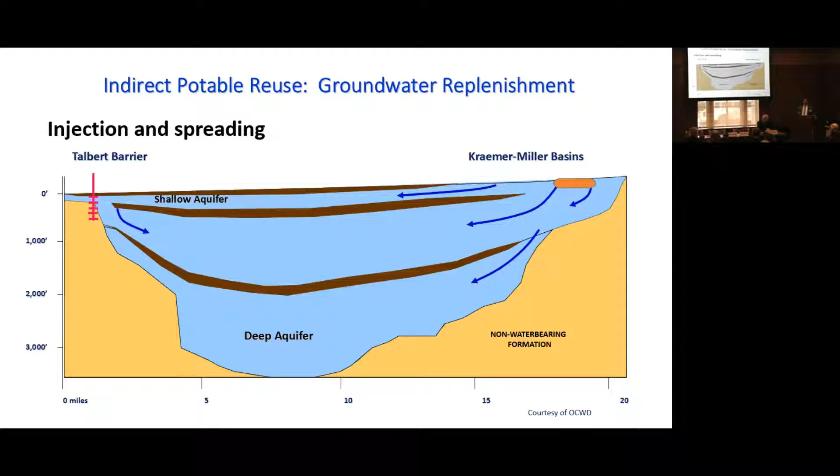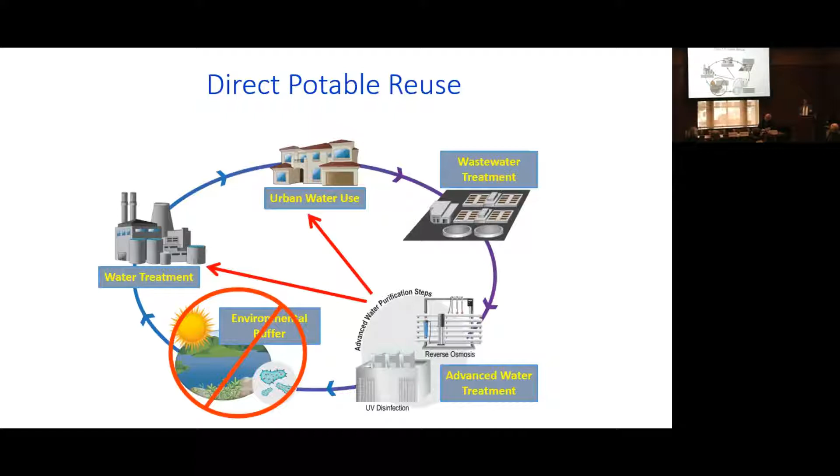So I just want to go over briefly what we're talking about in terms of potable reuse. We have indirect potable reuse that utilizes an environmental buffer, so it can be a groundwater basin, and there's two ways to get the water in the basin: you can do it through wells called injection, or spreading through basins, which also involves natural treatment, soil aquifer treatment. There's also surface water augmentation, I don't have a slide on that, that's another form of indirect potable reuse. And then what we're talking about a lot today is moving towards direct potable reuse, where we avoid the environmental buffer, and we either go directly to a surface water treatment plant or directly into a water distribution system. So there's a lot of questions associated with this, and I have a couple slides at the end specifically on direct potable reuse. But I want to step back in time a little bit and talk about where the National Academy of Sciences supported this area.

Back in 1982, and I really didn't know about this report that much until recently when I was looking this up, there was a report commissioned by Congress to study the use of wastewater, contaminated, or today we'd use impacted, Potomac estuary as a new source for the District of Columbia. It didn't go through, but basically they were going to use a reservoir, an estuary that had wastewater discharged into it, and they wanted to know if that could be done safely.

So it focused on water quality criteria. This was actually the toxicology board, not the WSTB. And the findings were very relevant today: the importance of treatment reliability, you'll hear that word a lot, the need for confirmatory data, which we call monitoring or compliance or performance data, a lot of monitoring of parameters, and the limitations on detecting trace organic chemicals at the time.

So what was going on in the potable reuse world? Well, there were specific projects that I call case by case, trying to solve specific issues. In California, they call it water supply, but they didn't have to build a pipeline to discharge to the ocean. There were reasons it was more practical for them to spread it, but that's the longest serving project, still operational today: Water Factory 21 in California, which was a saltwater intrusion barrier to protect the basin from seawater intrusion. That project has evolved into the groundwater replenishment system in 2008.

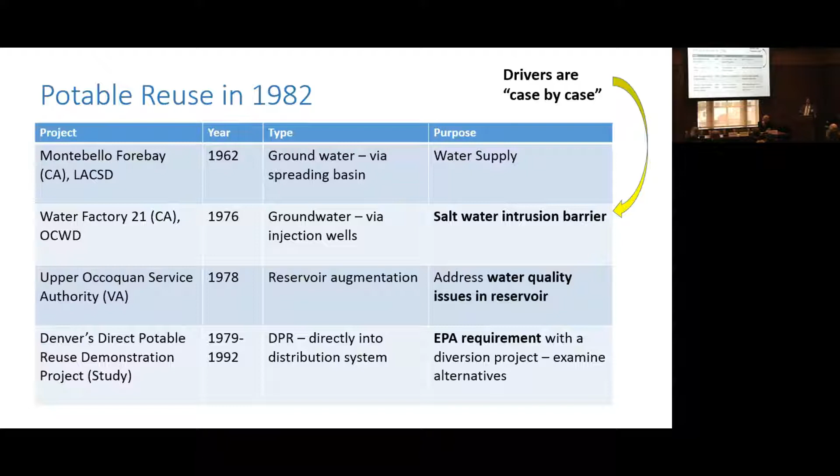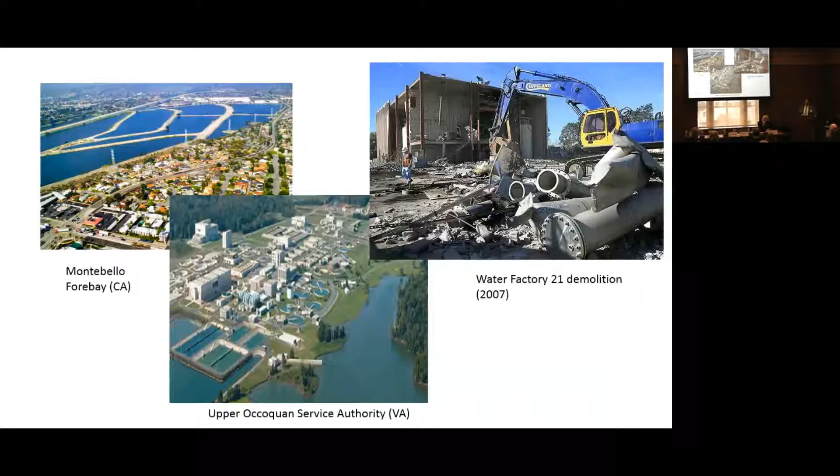So here are just a few pictures of Montebello Forebay. It's still in place, in a very urbanized area. Water Factory 21 was torn down in 2007 to make room for the groundwater replenishment system. And the Upper Occoquan Service Authority, that's their facility here, discharging to the Occoquan River.

I do want to take a minute and talk about the role of non-potable reuse, because we were able to become comfortable with potable reuse based on our experience with non-potable. We're using wastewater for other things besides discharge. It required a change in thinking, it was meeting customer demands, there was additional treatment needed, we worried about reliability more, and we had different water quality requirements.

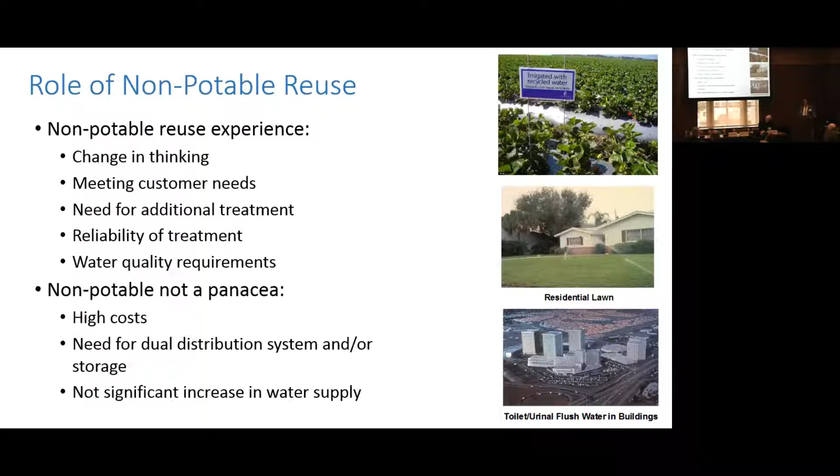But what we found out through a lot of work there is that it wasn't a panacea. There were high costs, you had a dual distribution system, maybe storage during wet months, and it wasn't a huge increase in water supply. So non-potable is valuable when it can be done, but it didn't solve all the issues we were trying to address through water reuse.

So in 1998, things were changing. There was more reason for the National Academy of Science to revisit this. A lot of our best water sources were already developed in terms of groundwater and surface water. We had more technologies coming on, advanced oxidation, membranes. There were public health studies with current projects, particularly EPI studies in Los Angeles. And there was increasing interest by communities and utilities in pursuing potable reuse.

So the study was supported by a range of interested parties. EPA was the largest contributor, but we talked about the USBR's interest, the research foundations, as well as utilities.

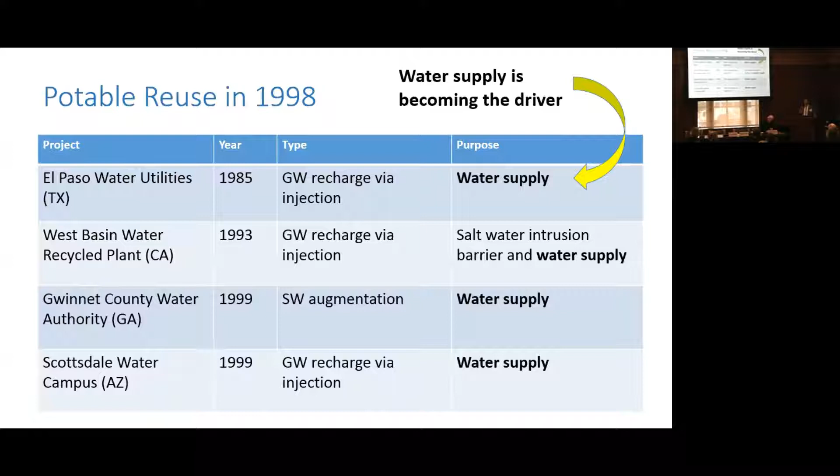So in 1998, there was a different landscape. We had more projects. El Paso had a project that was groundwater injection. West Basin, in South LA, had an injection project. Gwinnett County had surface water augmentation at Lake Lanier. Scottsdale had a groundwater recharge project via injection. And the primary reason was mainly water supply. So you can see now the idea was to use this as a resource for water supply, not just to solve a water quality or discharge issue.

So in 1998, the report covered a range of relevant topics: chemical and microbial contaminants, assessing health risks, which was very useful for having a science body do that for the industry, understanding the health effects, and then looking at this idea of reliability and quality assurance.

As most of you may know, there was one sentence that's very well known and has been a prolonged discussion within the industry: that the community views the planned use of reclaimed water to augment potable water supplies as a solution of last resort. So it resonated, we still talk about it today. We talk about how maybe it set us back, but I actually think in many ways it made us sharpen our pencils and think about this more, and realize that yes, this is provocative and we need to do it the right way. So a lot of good came out of that statement, but it did last with us and was part of our conversations.

So in 2012, there was another report published. This was looking at water reuse in general, but potable reuse was a big part of it. And the landscape was changing even more. There was a dramatic increase in interest in reuse, particularly potable reuse. We had four states that were doing a lot of reuse. Water scarcity was becoming a driver.

However, there were also several projects that failed during this time. Say they were proposed within a community, and due to issues, whether political or social, maybe the projects just weren't good enough, but they failed. And that got our attention. We knew that we just couldn't do these projects, we had to figure out how to make them acceptable to the public and really help them understand that they solved issues.

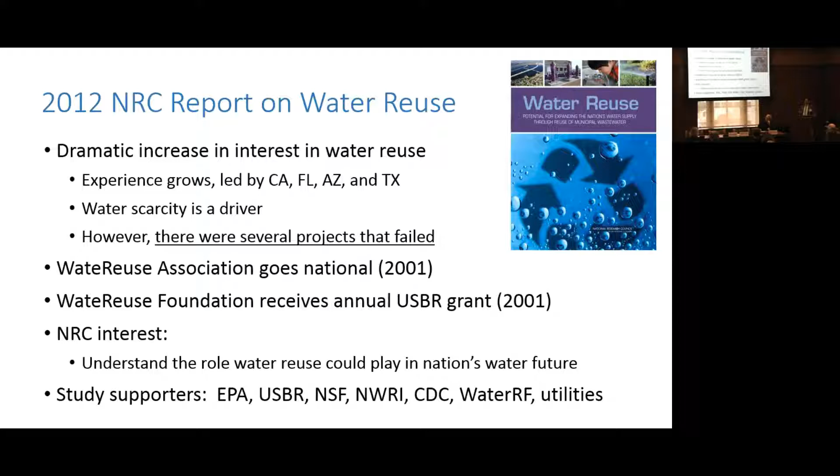The WateReuse Association went national. The WateReuse Foundation received a grant from the USBR. We used to call them earmarks, we can't talk about those anymore, we don't have that. It would be nice if we could get some federal funding for these type of research efforts. The NRC was interested in understanding the role of reuse and what part it could play in the nation's water future. The study supporters were a lot of the same ones, but you also see folks like CDC show up, National Science Foundation, and you can see the interest was broadening.

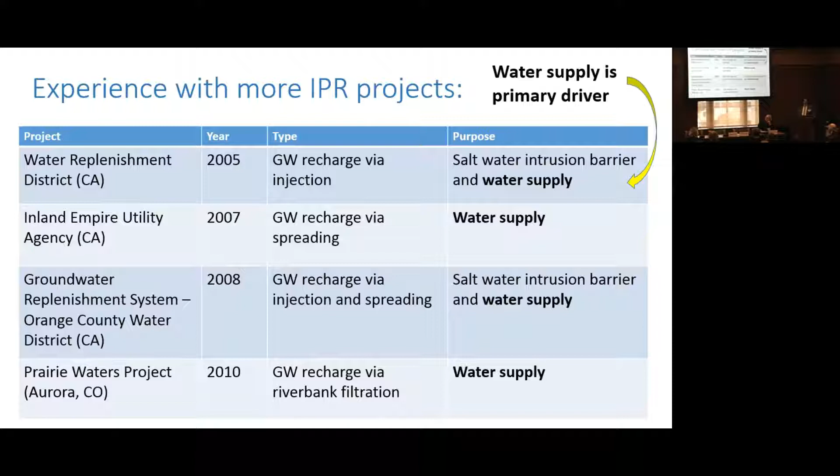In terms of projects, things were becoming bigger and more widespread. The Water Replenishment District in Southern California had a saltwater intrusion barrier as an application, but they're really interested in the water for water supply. Inland Empire Utility Agency, where Rich Atwater spent a long time as GM, has a groundwater spreading project. The groundwater replenishment system took the place of Water Factory 21. Right now it's the largest facility of its kind in the world, expanding to 130 million gallons a day, which is about 30% of the water supply in Orange County, California. There's also a project in Colorado involving natural riverbank filtration, again for water supply.

So the 2012 report was important in a number of different areas. One, we were really hoping we could get past this idea of the option of last resort, and we think we did. The committee came out with language that drinking water augmentation could increase the nation's total available water supply. That was very useful for us.

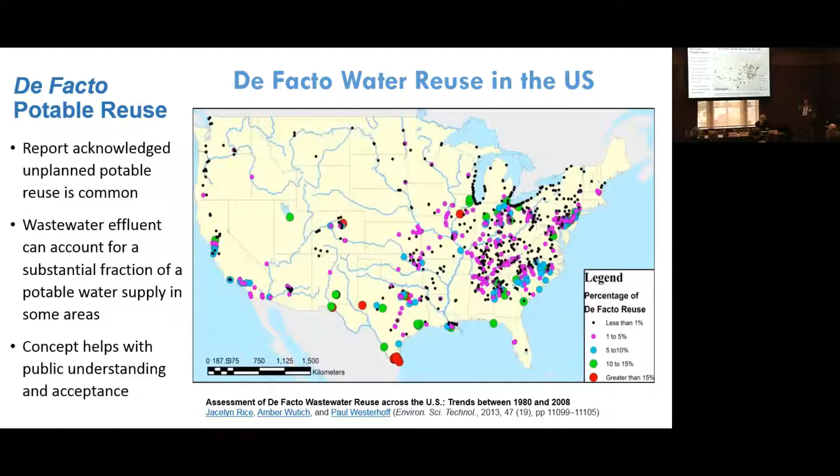I use this type of slide in many talks that I give around the country on reuse. It also addresses the idea of de facto potable reuse. The report acknowledged it, and this really helps us with public acceptance, that they understand our waters aren't as pristine as we tend to think they are. It also addressed a lot of science questions around treatment, monitoring, and operations - treatment options exist, but monitoring and operational plans are needed. I really felt the discussion on risk was very helpful: there are methods to assess risk, and an occurrence of a contaminant doesn't necessarily mean there's a significant risk. It's useful for a science body to be able to say things like that.

So now there are a number of planned projects, and we see the concept growing. The Metropolitan Water District of Southern California, which is solely a drinking water agency, is thinking about reuse - they're planning to build the largest reuse IPR facility in the world at 160 MGD. Hampton Roads Sanitation District here in Virginia has a bit of a different driver: they're going to get nutrients out of the bay, mitigate subsidence, and address groundwater overdrafting. There are a lot of benefits associated with that type of project, and that's probably what it'll look like in places like Virginia. El Paso Water is thinking about a DPR system - this would be a system without a surface water treatment plant.

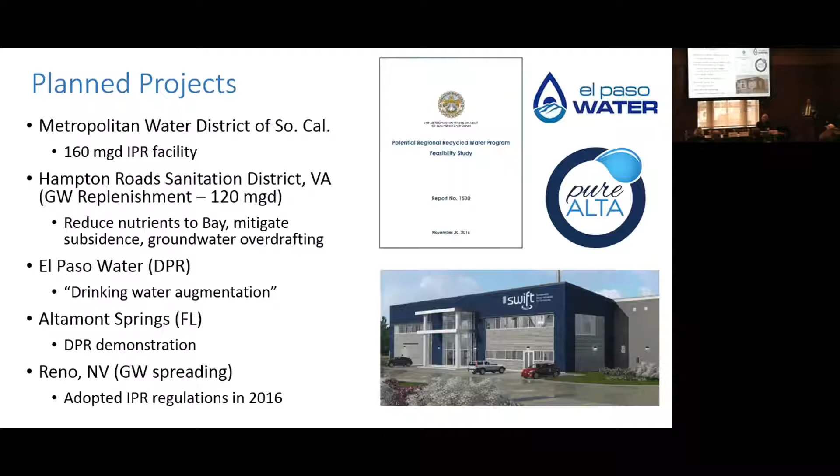They're moving forward with design on that. Altamont Springs has a DPR demonstration in Florida. Reno's in Nevada—other states you wouldn't think of, they adopted regulations in 2016 and have a project planned. So just a couple words on direct potable reuse.

Utilities see large advantages to going to reuse. It increases their flexibility—if you don't have a groundwater basin or surface water reservoir, you're still able to do it. And it's part of an integrated water approach. That's where we're going in terms of thinking about our water resources, doing it in a more integrated way. DPR and IPR fit into this.

We do have a DPR facility in Big Spring, Texas. It's the only operational one in the United States. Wichita Falls was an emergency supply—again, it was DPR, and it operated for one year.

In California, the State Water Board was asked to look at this. They had an expert panel answer the question of whether it was possible to develop regulations for DPR. They said yes—David Sedlak served on that panel. It was a great success in terms of the issues they covered. And there's lots of other states interested in regulations: Arizona, Florida, Colorado, to name three.

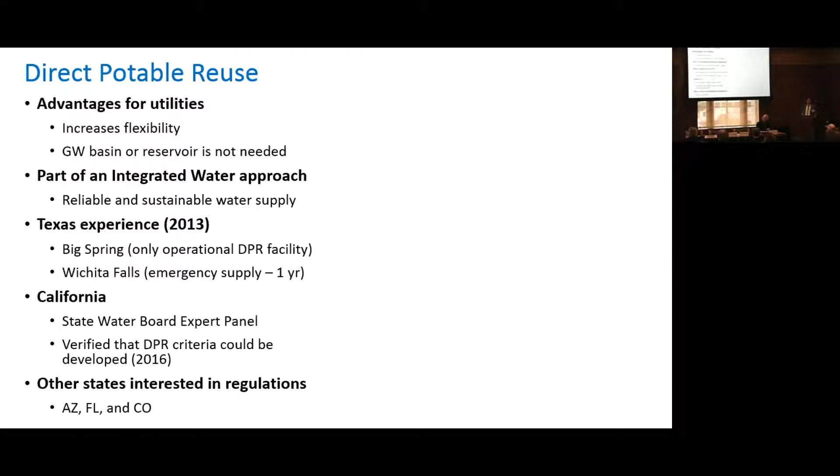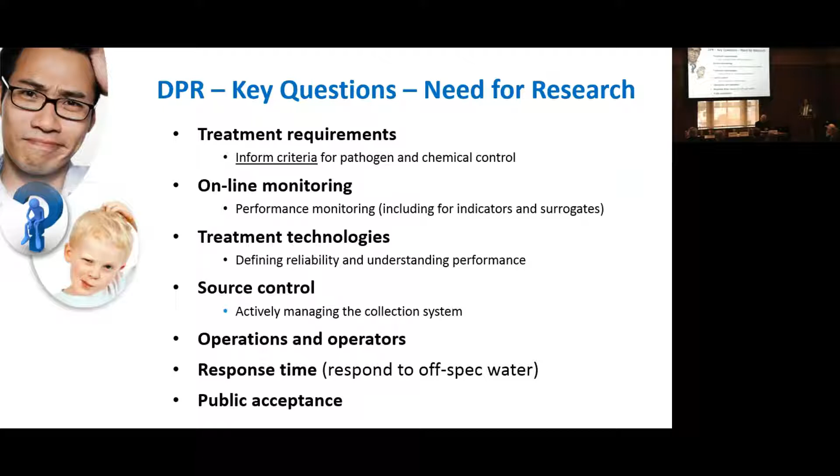So in terms of DPR, we do have key questions: treatment requirements, monitoring requirements, the technologies—are they reliable, understanding their performance—source control, keeping constituents out of the collection system. Operators and operations comes up as a big issue for regulators. They want to know it's operated correctly, response time, and public acceptance.

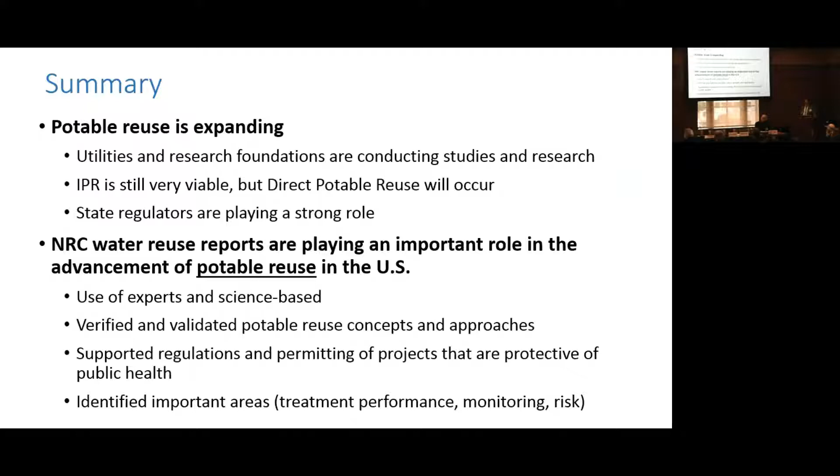So I'll just finish up with a quick summary. Potable reuse is expanding. Utilities and research foundations are conducting a lot of studies and research. IPR is very viable, and DPR is going to occur. State regulators have played a critical and positive role here. The NRC water reuse reports have played an important role in helping to advance potable reuse—the use of experts, science-based approaches, verified a lot of the concepts, supported regulations and permitting, and identified important areas for us to study.

So Dave, I'll stop there and turn it back over to you.

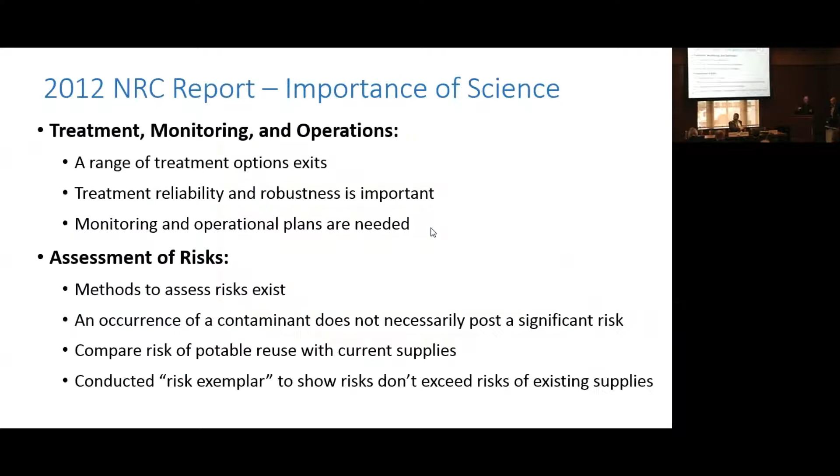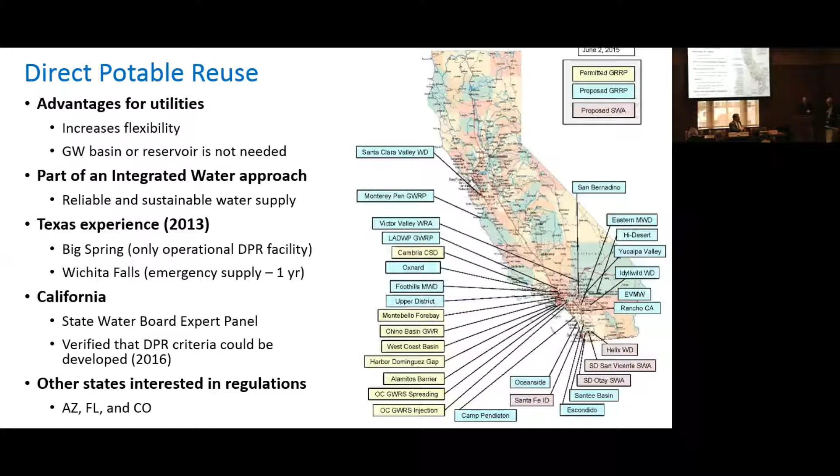So I think that's a perfect segue. The second half of our tag team, Dr. David Sedlak from the University of California at Berkeley, is going to look forward with us and get a perspective on where we're going to see water reuse programs going in the future. Thank you, Jeff, for giving us such a nice background to things.

I'm very happy to be here and to join the Water Science and Technology Board. This morning I sat in on the meeting and saw a lot of water scientists, an economist, and a few people who were bored. But I didn't see a lot of technologists with a capital T. I think maybe there are a couple of us thinking about this issue of technology, and I think technology is really important for a couple of reasons. One is that when a scientist or engineer invents a device, it's a technology, and that technology diffuses—it takes time, and then it comes into commonplace practice.

When new technologies are invented, they create new industries that jumpstart off of that existing technology. And finally, those new technologies sometimes teach us a way to see the world in a different way.

Consider your iPhone for a moment. 10 years ago it was invented. In a period of a few years, it diffused to a point where it was in just about everyone's pocket. As that device diffused, it created new industries, things like mobile navigation, mobile medical help, and also things like social media.

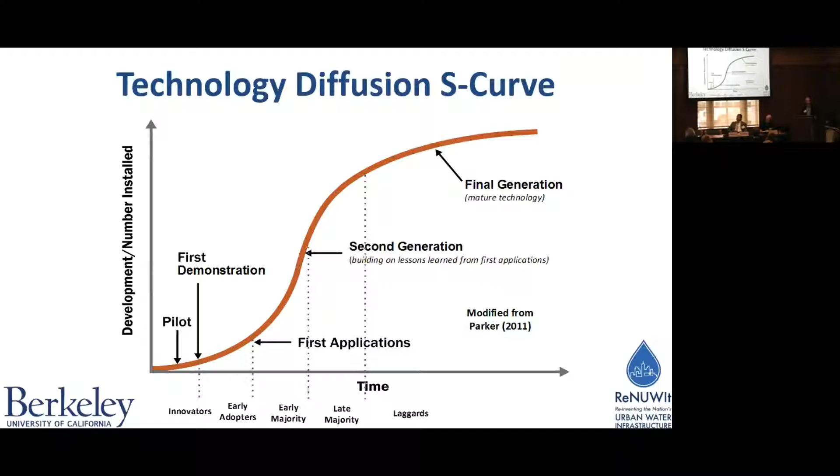I think Jeff told you about some of the projects that diffused out into the world, and how now we're moving into this period of the second generation, when new water reuse technologies are being used.

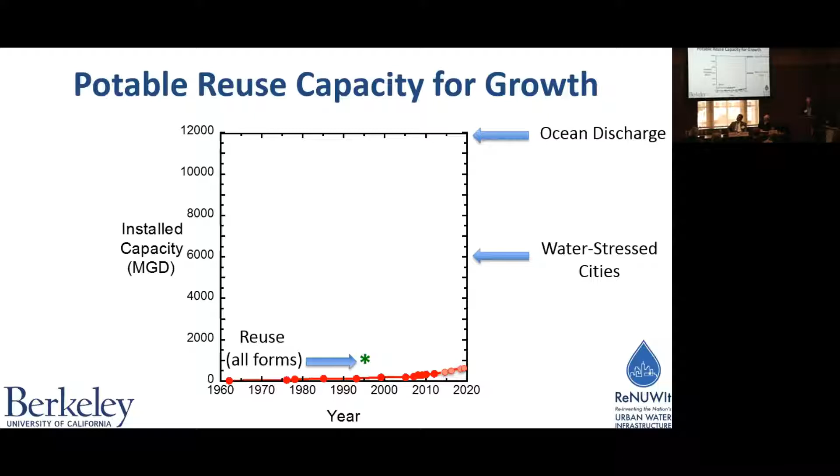Now, since the 2012 report, as Jeff told you, we've had a variety of new projects. In fact, the capacity of potable water reuse has increased by something like 80% since the 2012 report. So the technology is moving quickly, and as Jeff gave you that impression, we're diffusing quickly, and you get this idea that the train has left the station. But if you think about it harder, you'd say, well, we're only at 5 or 10% of our total capacity. What's holding us back?

With that in mind, the NSF Engineering Research Center, ReNUWIt, with a program in which I'm the deputy director, joined with the US EPA and sponsored a workshop at the Johnson Foundation at Wingspread in Racine, Wisconsin, on October 27th to 29th this year.

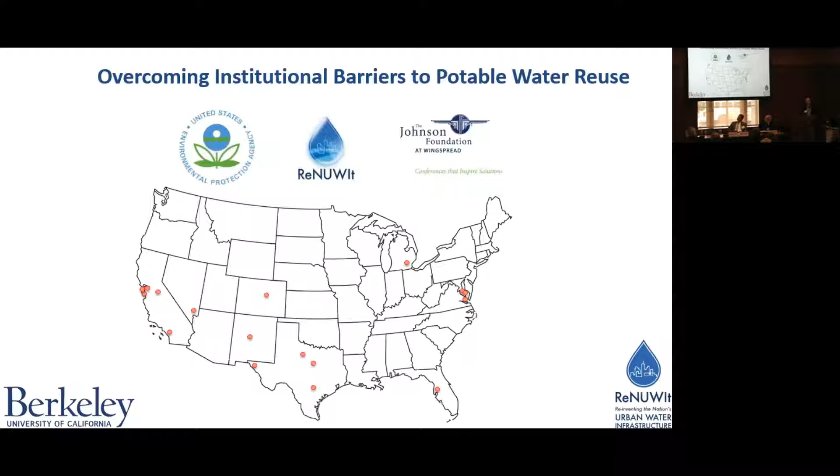We posed this question: how do we overcome the institutional barriers to potable water reuse? Because if we're not moving out and filling that need and the technology is not following the traditional S-curve, maybe there's a problem. It's not a technological problem. You can see that projects like the groundwater replenishment project in Orange County are doing just fine, thank you. There's not a big question anymore about the technology. Perhaps it's the institutions that are holding us back.

After a day and a half of discussions, we changed the title of the workshop because we came to learn that it's not really a question of institutional barriers. It's a question of leveling the playing field. Because water reuse is a technology that's ready for prime time. What we see happening now is that it has to undergo this process of mainstreaming where engineers and water supply planners look at it as a viable technology that they can use to expand a region's water supply portfolio, and it has to come to be seen on the same footing as other water supply options.

So when I think about the NRC's role in the future of potable water reuse, I feel like organizations like WERF or WRF, or whatever it's called now, Jeff, are doing just fine, thank you, because there's an industry that's taking this technology and moving it out, and there aren't the same sorts of large overarching questions. Even the DPR question is being handled by groups like the California Expert Panel or some of the expert panels that have been convened around the country.

So in terms of the first question of diffusing, it took the iPhone 5 or 6 years. It took potable water reuse 30 or 40 years, but it's on its way.

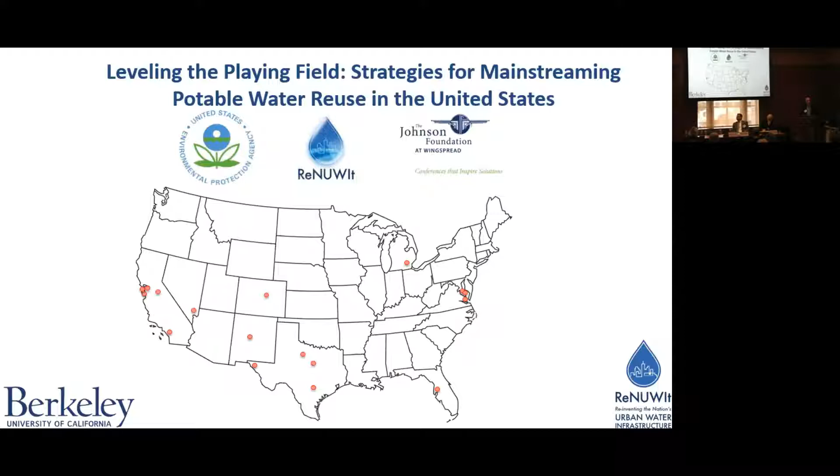What are the new industries, though, looking forward that are going to be spawned by water reuse? I think the real issue is how we scale it down. A lot of cities that have built potable water reuse systems right now are big cities with big treatment plants, 100 million gallons a day of water serving the needs of 1 million people, and they have a lot of expertise. They have full-time staff members who can dedicate themselves to water reuse projects. In some cases, they have sophisticated laboratories and PhDs on staff.

But not everyone lives in a city where you have a water treatment plant, a wastewater treatment plant that serves 1 million people. So a lot of cities are looking at what's going on in potable water reuse and saying, well, what about us too? And it's not just cities thinking about it, it's people like real estate developers and architects who are looking at this and saying, maybe this is the way in which I create a new water supply in a water-stressed area where I don't have access.

So one of the overarching questions now as this new industry starts to develop is: is it really different? Is it the same and only smaller, or are there differences? When I think about the differences between a large centralized treatment plant and a small scale treatment plant, I'll tell you in a moment what I mean by scale. One difference is you don't have the expert operators on site.

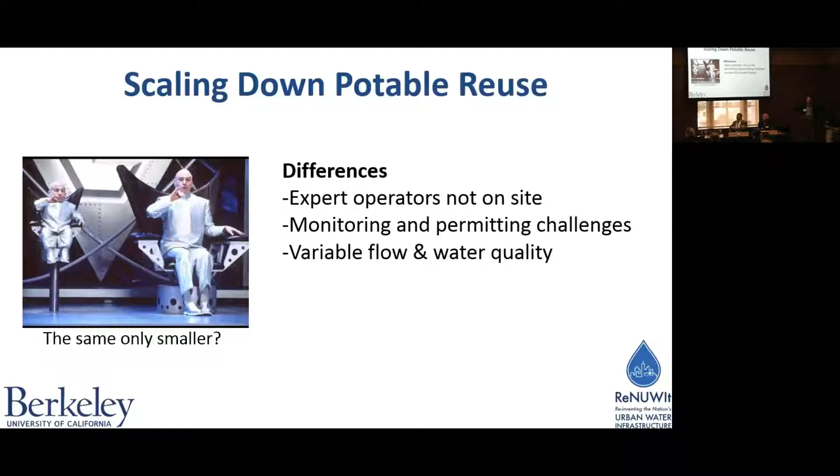The other is the monitoring. You can't do the same kind of sophisticated monitoring at the same frequency. There are going to be permitting challenges because each one of these decentralized plants now is a whole project to permit. And then you have this other issue of the flow of the water. There's going to be variable flow and quality, whereas the city, you're averaging water from 1 million people, and the water quality seems quite a lot more uniform.

So let's think about it as a continuum of scale. Let's think about an axis here, a logarithmic axis going from 1 person to 1 million people. What we're building now are centralized treatment plants that serve close to 1 million people and have this level of sophistication. Now, there are some challenges here of having some cities that have large centralized treatment plants that lack the institutional capacity to do this because they may not have the right finances, they might not have the right kind of institutional culture, but we think that is something that can be addressed. It's these smaller places where this new industry might be created.

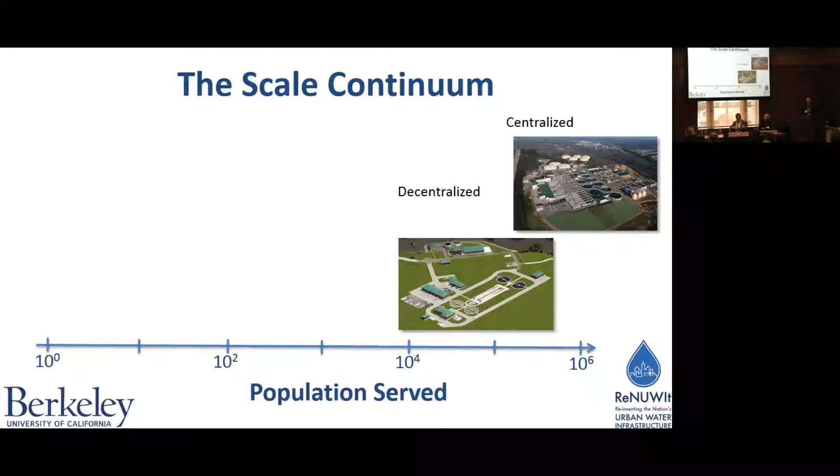If we think about decentralized treatment plants working on the scale of 10,000 to 100,000 people, you run into some of these same issues of not having a full-time water reuse person who can go to conferences and keep up with the literature, because they're trying to keep the plant running. But this seems to be something we're capable of doing. For example, the Big Spring plant served about 20,000 people, using the same technologies, microfiltration and reverse osmosis, that are used at big centralized plants, building up institutional capacity. This seems like something that's going to happen anyway in smaller cities.

We could think about another smaller scale, on the order of several hundred to several thousand people, which I'd call district scale or neighborhood scale treatment. Imagine you're a real estate developer building a greenfields housing development and you don't have a water supply. Your option is to run a pipe from a distant location, or find a way to use the small amount of local groundwater and rainfall and supplement it with water reuse. Potable water reuse could be part of this—you may not be limited just to gray water and toilet flushing.

This figure is from a project by the Charles River Watershed Association about non-potable water reuse at the district scale within Boston. But cities like San Francisco are starting to think about potable water reuse at the neighborhood or district scale to augment the water supply. Some of that comes from the fact that once you break the tie to the centralized water supply, it's more than just a water conservation project—it obviates the need for a centralized drinking water system distributing water to your neighborhood, which can have tremendous economic savings.

And finally, we can think about the building scale. There are architects and developers thinking about doing potable reuse at the building scale. Sometimes, like with the Bullitt Center in Seattle, you might do this because it's an ultra-green building and you want to demonstrate what you can do. Other times you might be in a rural community where the local groundwater or rainwater supply isn't enough, and you couldn't live there otherwise—so it's a choice between direct potable reuse and bringing in tanker trucks full of water.

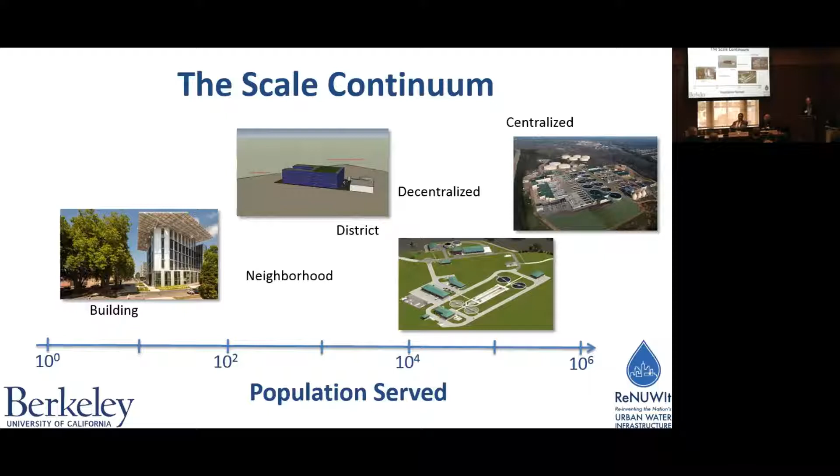If you don't believe this is something we're going to see in the future—and I hadn't really thought much about it until a few years ago—look at this project recently permitted and built in Ohio. It's a building-scale DPR project built by the Tangent Company, which passed review by Ohio public health regulators. It was a small land trust in a location with a tight aquifer that didn't supply much drinking water. So they took their septic leach field and turned it into a direct potable reuse system, conducting a research project showing that the reverse osmosis and advanced oxidation processes used at the building scale were just as effective as those at the centralized scale. This opens up a new industry and a new way of providing water to people.

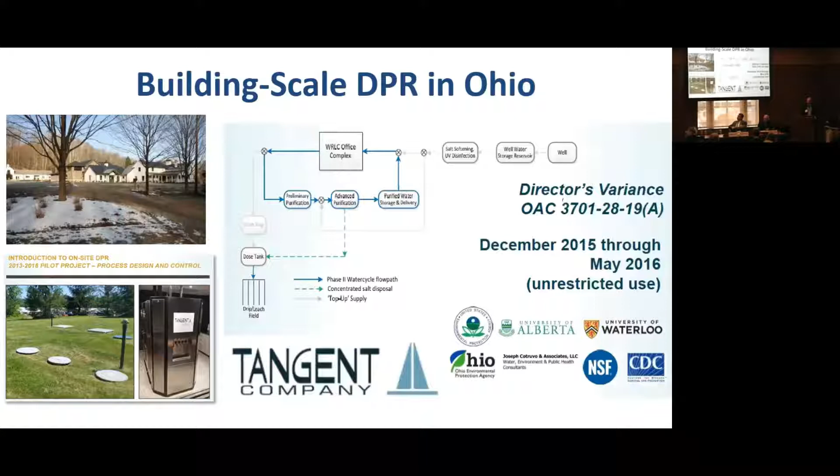So that's the diffusion of the technology and the possibility of new industries being created. Let's turn to the third issue: perceiving our drinking water differently. Let's think about what I'll call the technology continuum. I forced myself, in making these slides, to think about the perceived efficacy of treatment plants from low to high. I don't want to imply that any of the treatment plants I'll show don't provide safe drinking water—they're all actual plants that do provide safe water. But some, I think engineers and water scientists would agree, are safer than others because they provide more barriers and safeguards against possible deviations in water quality. So let's start with full advanced treatment, or FAT.

This is the kind of treatment train that's used in Orange County in the groundwater replenishment project. And in many of the DPR projects being built now, they use this as the core, and add more technologies on top of it to assure water quality.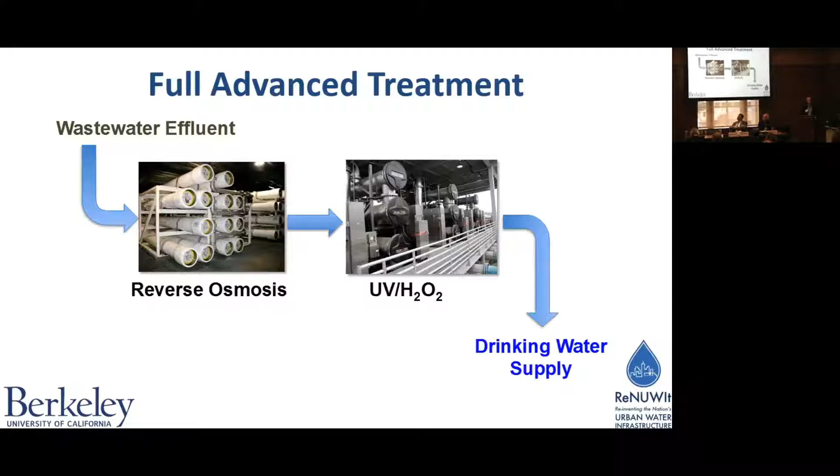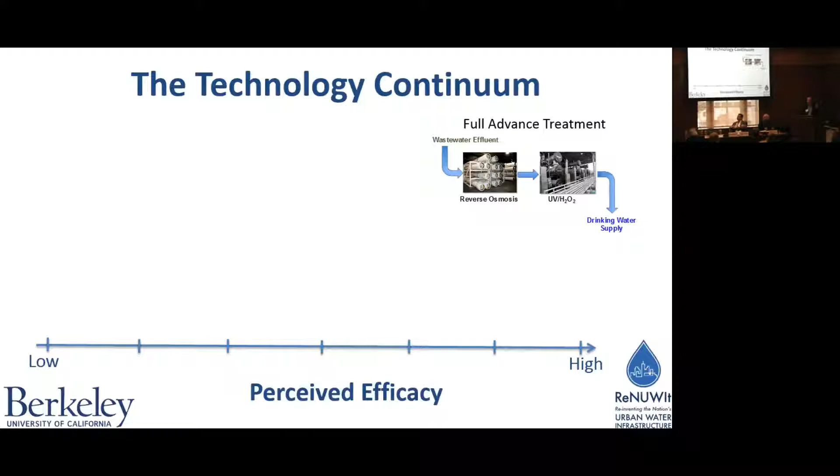There are probably a half a dozen projects like this that use reverse osmosis followed by UV light and hydrogen peroxide, or an advanced oxidation process, before putting water into the drinking water supply. I think if you talk to engineers, they would say this is the gold standard, full advanced treatment. It's probably the highest efficacy treatment system because it's usually accompanied by things like industrial source control and continuous monitoring that assure high quality water and multiple barriers for pathogens and chemical contaminants.

Now let's look at managed aquifer recharge. Jeff already mentioned the LA County spreading basins and the Aurora project at Prairie Waters. There's also a project in Orlando, Florida, sometimes called the RIBS project, Rapid Infiltration Basin. I put these circles here to show you the relative size. About enough water for 1 million people is that blue circle on the side there. You can see these are big projects that have been running for quite a while, and I would say they're pretty darn good. We've been doing this since 1962 and know a lot about the LA County project.

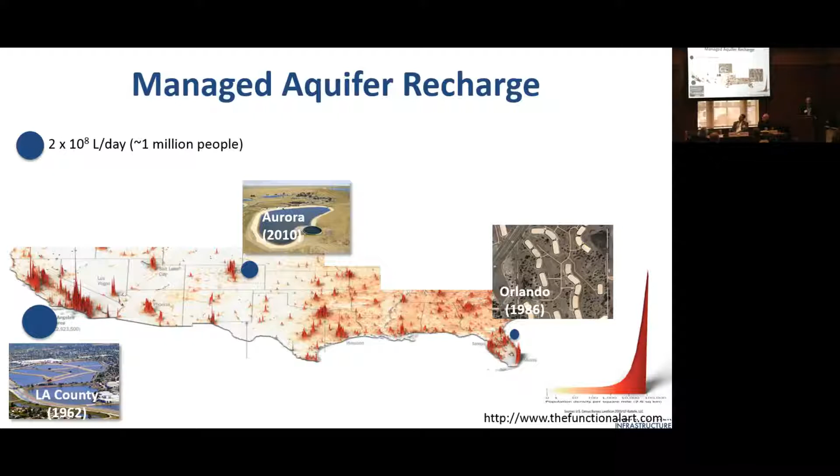We'd probably never build another project like the Whittier Narrows project. If we built projects in the future, they'd probably look like the Prairie Waters project in Aurora, Colorado, where we use riverbank filtration. We pump that water out and put it into what I would term an artificial aquifer for some enhanced soil aquifer treatment. Then we send that water to an advanced treatment plant with an advanced oxidation process, GAC, BAC, and chlorination.

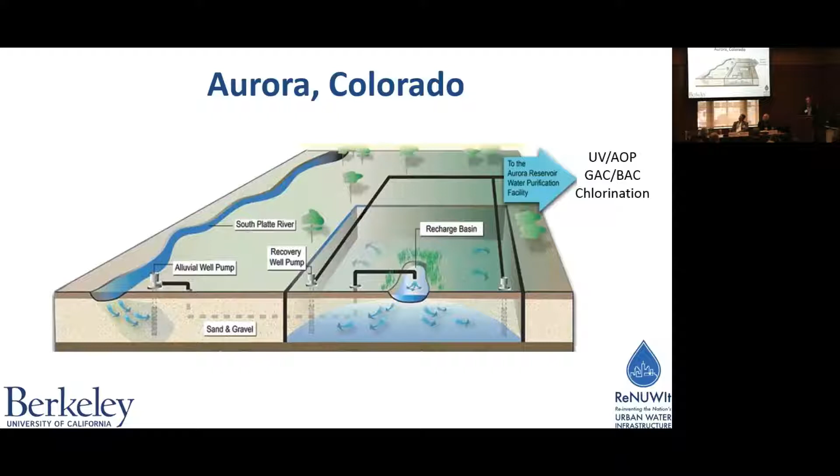So we also use advanced drinking water treatment on this water after it's been through. That water coming down the South Platte River is essentially pure wastewater effluent from the city of Denver. So I would put this as almost as good as the full advanced treatment of Orange County, but it doesn't have the reverse osmosis membranes that were essential in Orange County that provide a lot of the health protection barrier that engineers feel is so good.

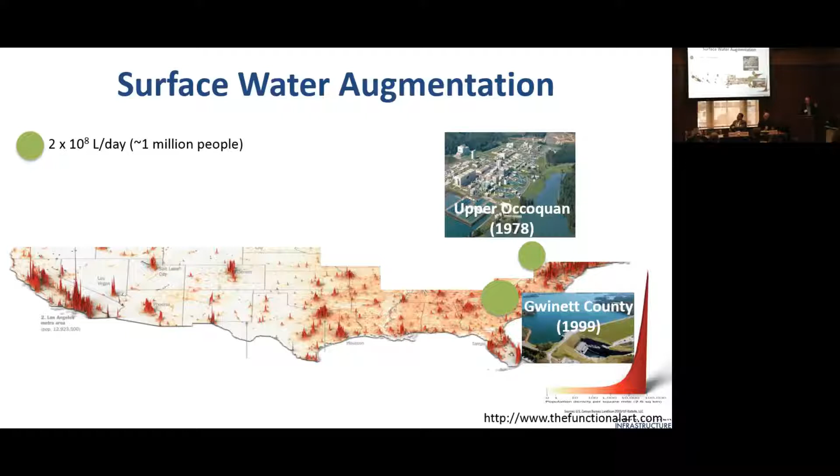The third one I'd put in here are these surface water augmentation projects. Jeff already talked about Gwinnett County, the Upper Occoquan project as well in Virginia. These are projects where you basically use the best possible wastewater treatment plant, like an advanced wastewater treatment plant, and then you put the water in a reservoir and it spends time there, and then you treat it again when it comes out of the reservoir.

So this is what the Upper Occoquan project looks like in terms of technology. You can see in brown there all of the wastewater treatment technology. So those are not your grandmother's wastewater treatment plant. You have lime clarification, multimedia filtration, GAC and BAC, ion exchange and breakpoint chlorination when needed, followed by a final chlorination. The water goes into the reservoir, and then the drinking water treatment plants have ozone and GAC. So you can see lots of barriers.

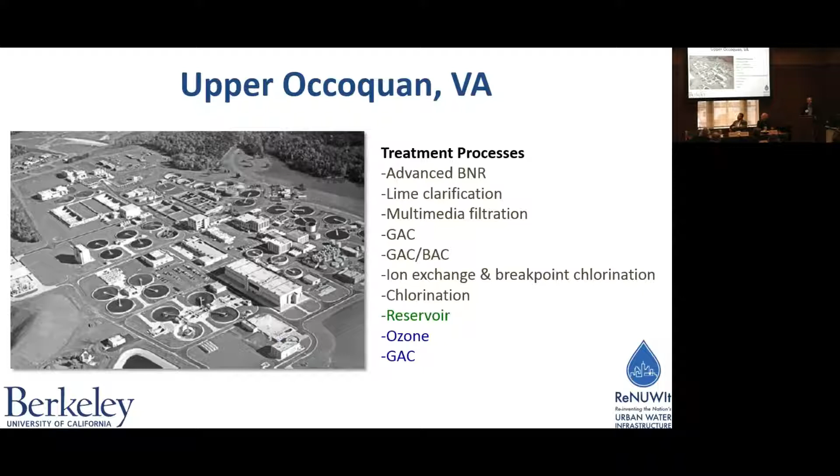My concern here is that a surface water reservoir is probably not as good as a groundwater aquifer because you have more hydraulic short circuiting, shorter residence times, and the potential for pathogens to make it from the wastewater into the drinking water supply that probably don't exist in the same way in a soil aquifer treatment system. So I would put it just below the managed aquifer recharge system.

And finally, the last category is kind of on this continuum of de facto reuse that Jeff mentioned. I'll just mention three projects here: the Santa Ana River, where the wastewater from the Inland Empire goes down to Orange County, and Orange County takes it out of the river and percolates it into the ground, and it becomes the groundwater of Anaheim.

The Trinity River in Texas, where the wastewater of Dallas and Fort Worth end up in the reservoir for Houston and becomes a significant fraction of Houston's water supply, as well as Dallas-Fort Worth's water supply. And then a project in Clayton County where engineered treatment wetlands are used to treat wastewater before pumping it into a reservoir. These projects are maybe exemplified best by this project near Dallas, the East Fork project, where wastewater from the effluent-dominated Trinity River, essentially pure wastewater effluent at this point, passes through some constructed wetlands.

You can see them here, these surface flow wetlands, and after passing through the wetlands, it gets pumped into the local reservoirs and becomes a drinking water supply.

Now, I've studied wetlands for a number of years. They're generally pretty good at removing nitrate during the summertime, but they don't really do a very good job removing viruses, and they don't do a very good job removing trace organic contaminants.

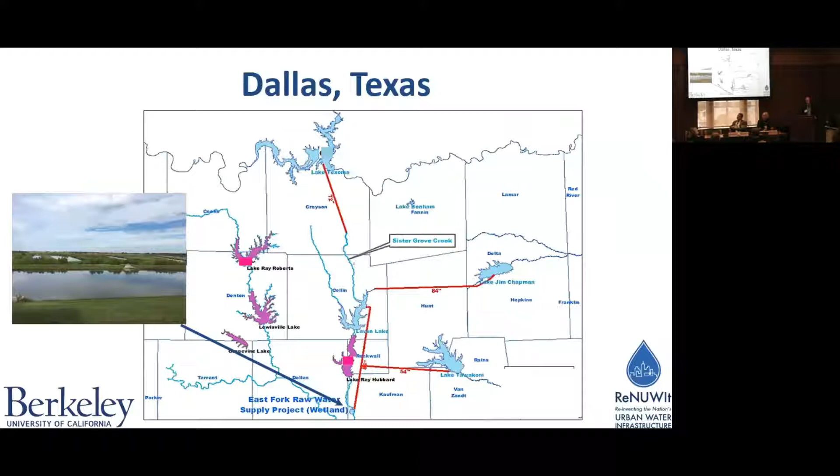That's been a concern of mine for many years. In fact, it's been a research topic of mine, and one of the things I've done through our ReNUWIt Research Center is work on developing new kinds of treatment wetlands that could more effectively inactivate viruses and remove trace organic contaminants with wetland systems.

I said this would be a great project for them to replace those surface water wetlands that exist in Dallas and Fort Worth, that I think are not giving them good water quality improvement.

So we made a trip to Dallas, Fort Worth. We met with some of the folks down there, and we said to them, this would be a really good thing to do. And they said, you know, you're right, it's probably a better treatment technology, but we can't convince our board to spend money on this. And besides, we're already in compliance with the Safe Drinking Water Act. So why would we do anything beyond the Safe Drinking Water Act?

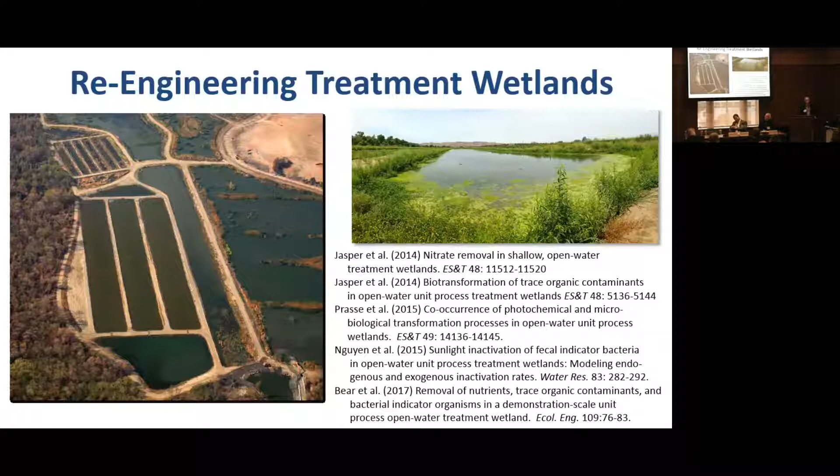That put me face to face with an issue that I think is equivalent to the way we re-examine the way we see news now. I would call this the Big Discontinuity.

The Safe Drinking Water Act was designed to regulate a system of drinking water where really the last technological improvements were early in the 20th century. So it's really biological wastewater treatment, followed by filtration, sand filtration or mixed media filtration, followed by dilution in the environment, followed by disinfection, chlorine, ozone, UV, and that's it. That Safe Drinking Water Act regulates that practice and provides us with safe drinking water.

When you confront people in the drinking water field with this big discontinuity, you get one of two different responses. What you hear from the drinking water people, the Safe Drinking Water Act people, is that those crazy people doing potable water reuse are totally overdoing it. We can deliver safe water just fine and not spend all that money, and we're very comfortable with the Safe Drinking Water Act.

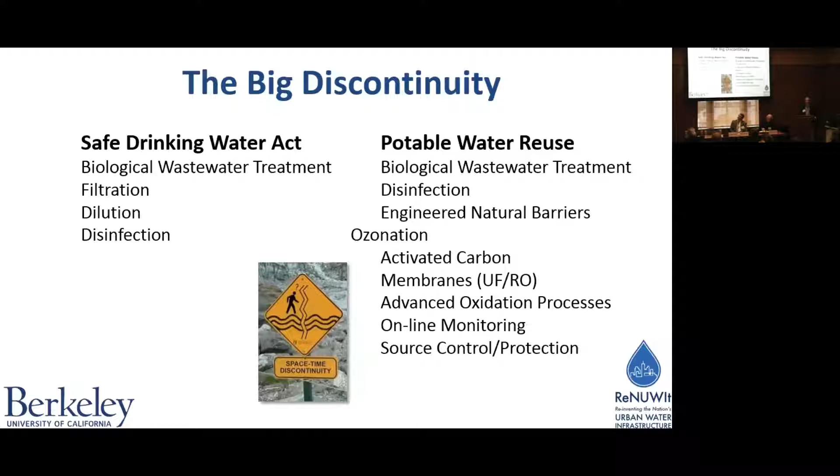Well, you could guess based on my history and pedigree where I come down on the side of saying that maybe the Safe Drinking Water Act needs to be re-examined. Let me give you 3 examples of where I think the Safe Drinking Water Act is failing us now.

24 years ago, the largest public health outbreak in the United States happened, the Cryptosporidium outbreak in Milwaukee. It was detected because the city ran out of Pepto-Bismol.

We've done some things since then to assure that maybe Milwaukee doesn't happen again, but I would think that we could do a little bit better than what we've done by putting a Band-Aid on the Safe Drinking Water Act with the idea that we could prevent that from happening again.

I don't think in the kinds of potable water reuse projects I work on that we would ever see this kind of public health outbreak and it would go undetected. There are just too many multiple barriers. There's too much scrutiny of the process.

I wouldn't be surprised if another crypto outbreak or something equivalent like Legionella, well, it's already happening, were to happen again. West Virginia, 3 years ago, a water supply goes out of business for a couple of weeks because a spill happens upstream of the distribution system and gets carried into the distribution system and contaminates it.

That just is not going to happen with a potable reuse project. There's online monitoring, which if we had a departure in water quality, would send the water somewhere else and wouldn't send it into the distribution system. This is kind of embarrassing when this stuff happens.

And finally, happening right now, millions of Americans' water supply being tainted by perfluorochemicals or PFAS, which are being used in military and civilian airports as well as in consumer products. And you know, when you wake up in the morning and you hear that 15 million people are drinking water with concentrations of a toxic chemical that's causing health effects, and it's not being regulated because the CCL process is broken and is unable to add new chemicals to the regulated chemical list, you feel a little sad.

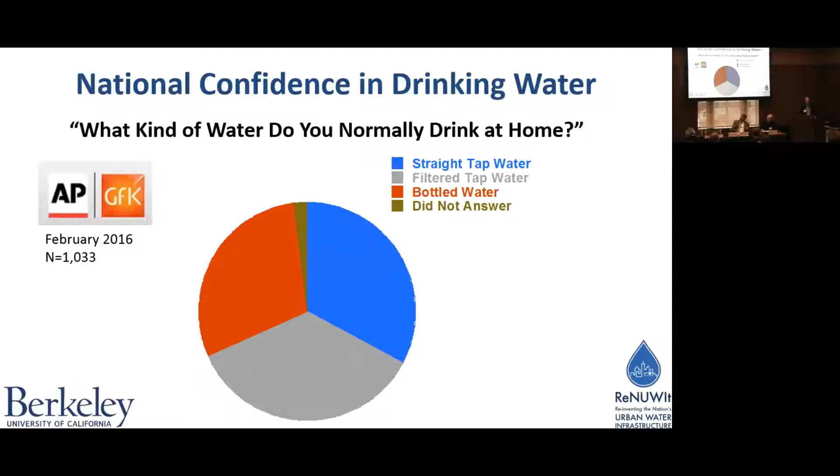I think if we think that the Safe Drinking Water Act is being effective, we are in the minority here relative to the public. And if we want to build public trust and confidence in the water supply, as well as protecting public health, I think maybe this idea of re-examining the Safe Drinking Water Act is something that's spawned by the rethink of drinking water that comes from potable water reuse.

So some questions of national importance that we might want to ponder. On the technological side, how can the latest technologies be applied to more effectively detect chemical contaminants and waterborne pathogens, both in terms of public health monitoring, like sentinel monitoring, and developing an understanding of unknown contaminants before they turn out to be problems? How can we better assess effects at the community level?

I've been to meetings at CDC. It's really hard to figure out if contaminants in drinking water are causing public health threats. But with things like the exposome and emerging technologies from the biosciences, we may be able to see these kinds of effects in communities. What types of drinking water technologies can offer improved public health protection?

Maybe membranes shouldn't just be used at water recycling plants. Maybe they should be used more frequently at surface water treatment plants that are subject to upstream contamination. And what role should managed natural systems play in water quality improvement? Right now, with managed aquifer recharge, we throw it in the ground and hope it works. Likewise with wetlands, if it's pretty and it has birds, we could do a lot better there in terms of technology.

And then institutional issues, I think that this whole issue of sources of contamination, it's more than just what comes out of the sewer. We use our sewers as an industrial dumping ground for chemicals from commercial industries. And that often is the source of contaminants, things like the PFAS compounds.